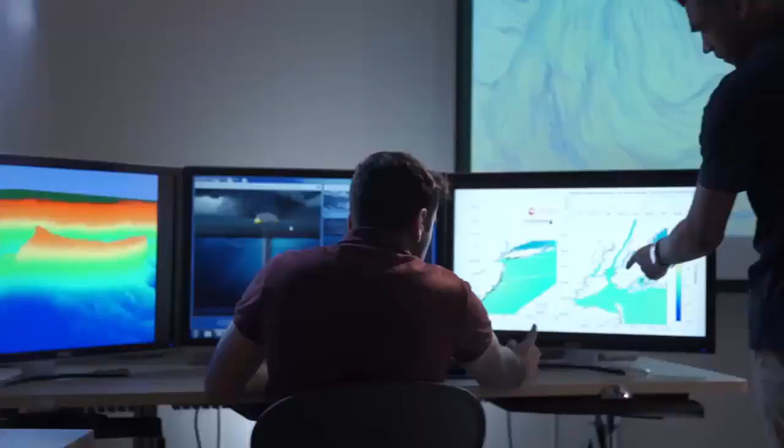In the Sustainability Management Master's Program, you are answering one simple question. Do you care about your future generation? If you care about your kids, their grandkids, then you care about sustainability. And a sustainability manager is someone who has the tools to make people understand how they can contribute towards developing a sustainable world.

We have both part-time and full-time students. Our curriculum is 30 hours. Instead of a thesis, we have a research project course and a seminar course which provides them with the kind of research background they will need to be successful in their job. At the same time, sustainability is not always everything about environment. It also relates to the business.

They will take a sustainable business strategies course. They will take a project management course. Most of these courses are going to be taught by industry people, the people who are doing sustainability on a daily basis as a part of their job. Any organization that has a large number of employees and has a physical infrastructure, they will have to have a sustainability office.

If you have the passion to develop and maintain a sustainable world, come to us and we will help you shape your passion into a career which will create an impact.

So I'll just briefly introduce myself and give you my background. As you were told, I'm a Stevens alumni. I started my undergraduate in 2005 and graduated my undergraduate in 2009 in environmental engineering. At the time I was getting ready to graduate, I started doing some job interviews, mostly brownfield remediation sites, wastewater treatment facilities, which is what I was looking at the time based off what my degree was focused on.

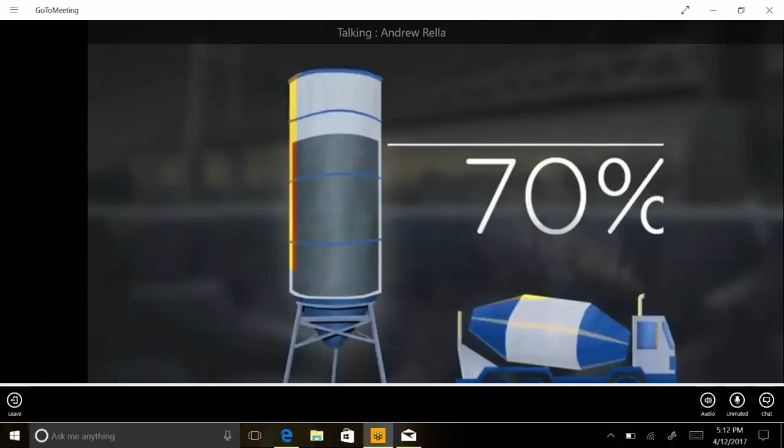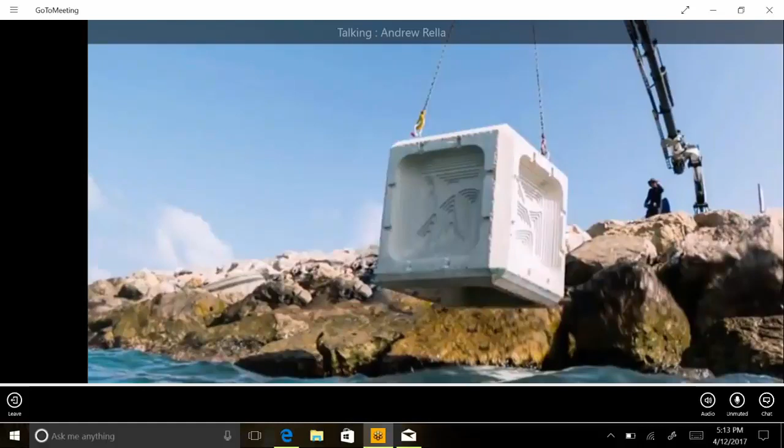ECOncrete brings urban and coastal concrete infrastructures to life using proprietary bio-enhanced concrete. Two thirds of the world population concentrated around coastlines, exposed to ever-increasing extreme weather events and rising sea levels. Accelerated coastal development is inevitable, creating tremendous pressure on marine ecosystems. 70% of coastal infrastructure is concrete-based. Our science-based concrete compositions, textures, and designs enhance the biological performance and ecological value of concrete structures, while increasing their durability and lifespan. ECOncrete provides services from A to Z, from site analysis, concepts and design, through product supply, to project monitoring. Our technologies can be applied as ready-to-use precast products or by using our unique forms alongside our bio-enhancing admixtures.

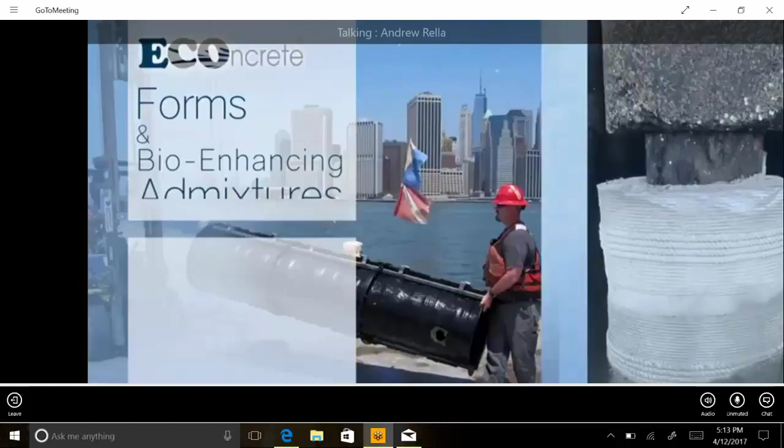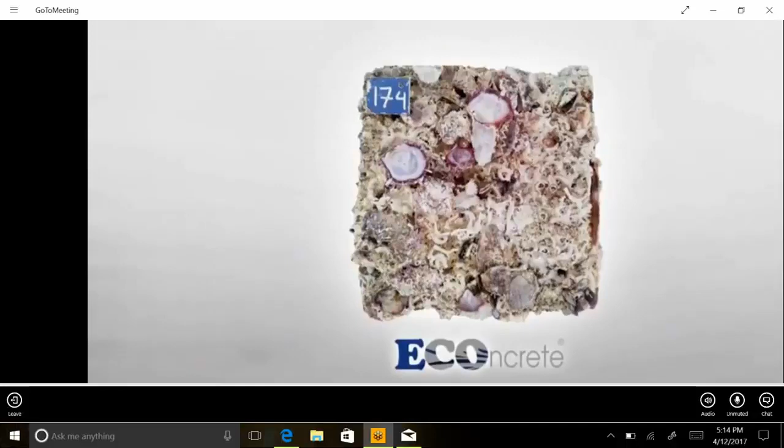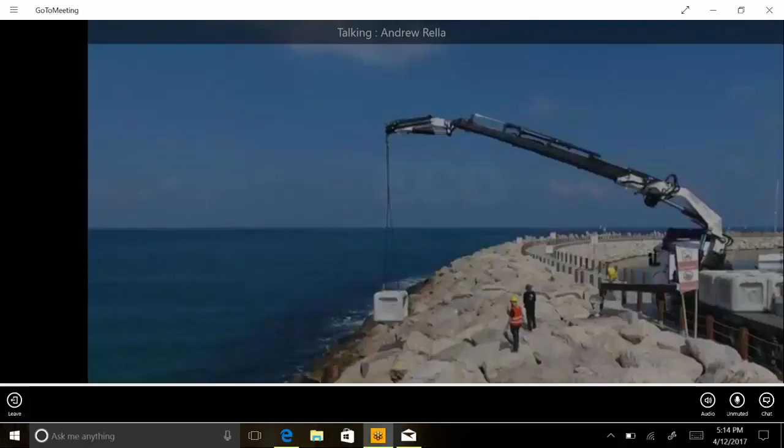The company's line of precast products currently includes ecological armoring units, enhanced seawalls, design tide pools, and articulated concrete marine mattresses. Our forms, liners, and admixtures can be used for on-site casting of new elements or for retrofitting structures like pier piles. These can also be used by licensed partners at their home facility. All our products are tailored to encourage growth of diverse plants and animals, such as oysters and corals, which build calcitic skeletons on the concrete, in a process called bioprotection. This calcitic layer encases the concrete, contributing to the strength and stability of the structure. Our patented bioenhancing admixtures have been fully tested in a variety of marine ecosystems across the globe, yielding excellent results. We have succeeded in creating a win-win solution for both thriving ecosystems and high-performance concrete structures. The scientists and professionals at ECOncrete are proud to be at the forefront of the next generation of ecological engineers, and we invite you to join us.

Okay. So I like starting with that just because it gives you a general background and sort of a great start to introduce our technologies and how we try to implement them into coastal infrastructure projects. So getting right into it, ultimately the population of the planet has increased exponentially, especially over the last

100 years or so. And a lot of those populations, actually more than 70%, are focused within 100 kilometers of the coastline. With that high population, there come these stressors on the shorelines, where there's pressure to keep water out, to stop erosion, to protect the land where it is, where historically civilizations or different cities weren't located so close to the ocean, or you wouldn't have homes typically on barrier islands like we see in New Jersey.

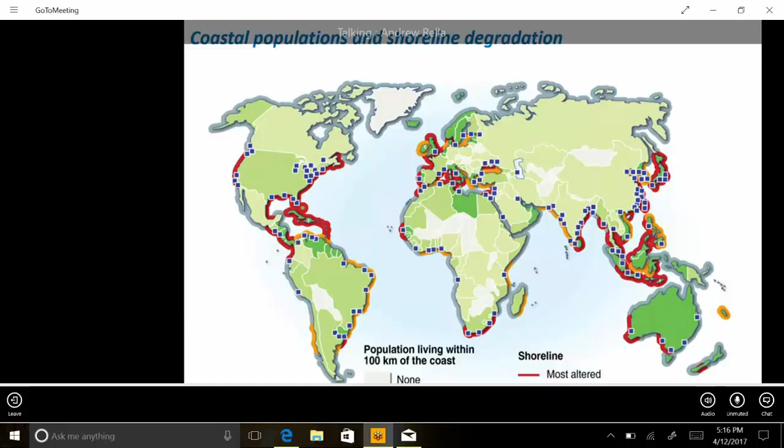Really, we've exposed ourselves to vulnerabilities by creating infrastructure, homes, utilities so close to the shoreline. So ultimately, we've been forced to, what the term would be, harden the shoreline, and along with that hardening, unfortunately, there's been a significant loss of habitat, species biodiversity, species abundance.

Ultimately, what we have done is we've taken the intertidal zone, which in a natural environment is anywhere between your high water and your low water within the daily tidal range. And that's, in a natural setting, the most diverse and abundant place for these species to develop, because there's the most sunlight, the most nutrients, higher flow rates along the surface, so there's better circulation, so you can clean the water better.

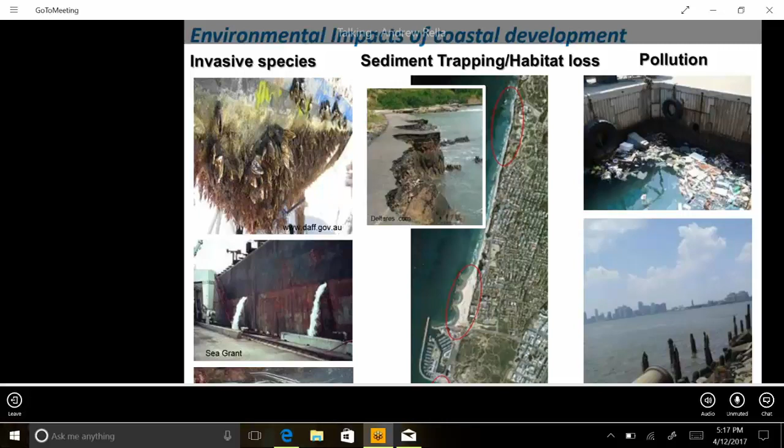All in all, more than 90% of the species that grow prefer to grow in the intertidal zone itself. But over time, we've replaced all these natural settings with vertical concrete structures, wooden structures. And here we see that more than 70% of coastal infrastructure is concrete-based. There's lots of reasons for that.

Basically, concrete was invented in ancient times by the Romans, especially the concrete for setting in water. They developed, as I mentioned earlier, admixtures. They added in different ash materials, volcanic ashes, into the cement that actually allowed it to cure underwater and to dry and get stronger over time. So concrete is an extremely useful product.

If you're in an environment like the Mediterranean or Israel, you see these large units here on the bottom. Those are antifers, armoring units. There's dozens of these different proprietary units, and they're popular in that region because they don't have stones large enough to combat the wave erosion they're exposed to. During winter conditions, waves from 20 to 30 feet are typical along some of these shorelines. So there's not enough natural stone large enough to mitigate that impact, so they make precast units.

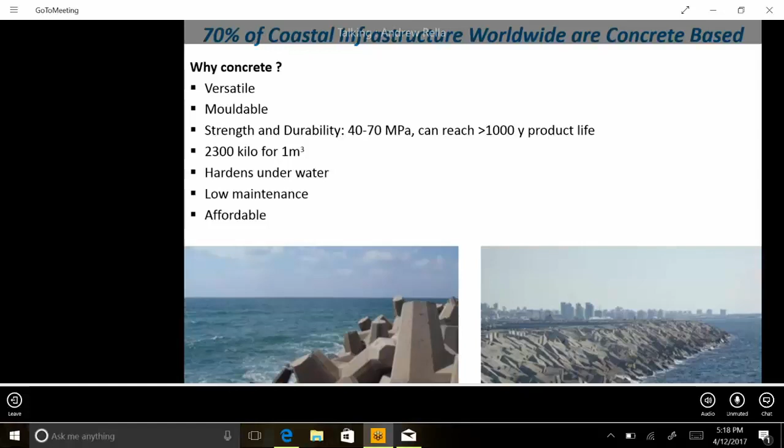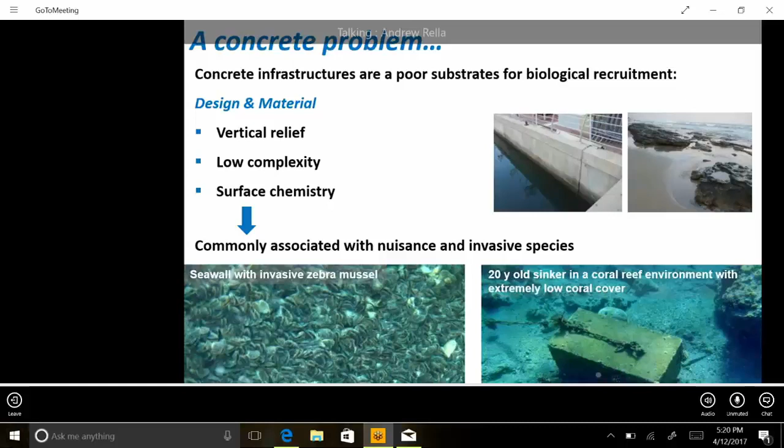Also, concrete, as you see on the top, is created traditionally in these vertical forms, right? Say in New York, the tidal range is 4.5 to 5 feet. So your tidal range is literally restricted to that vertical distance of 5 feet. It travels up the wall to the high point, travels down the wall 5 feet to the low point. However, in the natural shore zone next to it, same tidal difference, 5 feet, but it's allowed to impact hundreds of feet of the shoreline due to the mild sloping shores.

So what we like to do at ECOncrete is we modify the composition of the concrete itself with our admixtures. You can run it for me. Portland cement has a pH of 12.5 to 13. It's extremely basic, and that's one of the major reasons why these organisms can't populate its surface. There's plenty of naturally occurring larvae and organisms in the water, and if there were substrates more natural to them, they would occupy them.

However, since we're using concrete, there's a lot of chemicals that leak out of concrete over its lifetime. There's just a lot of negative components in it, often even the mold release. Sometimes in these units they use all sorts of oils and really not environmentally friendly materials. So what we do is we replace anything that's negative with something that could be positive for biology.

So for our mold release, you can imagine that if you're cooking and you want to spray oil on your pan, it depends which oil you use, whether you're using virgin olive oil versus coconut oil. Just as it affects your food, it affects the chemistry of the concrete. So we actually use a vegetable-based form release for our products.

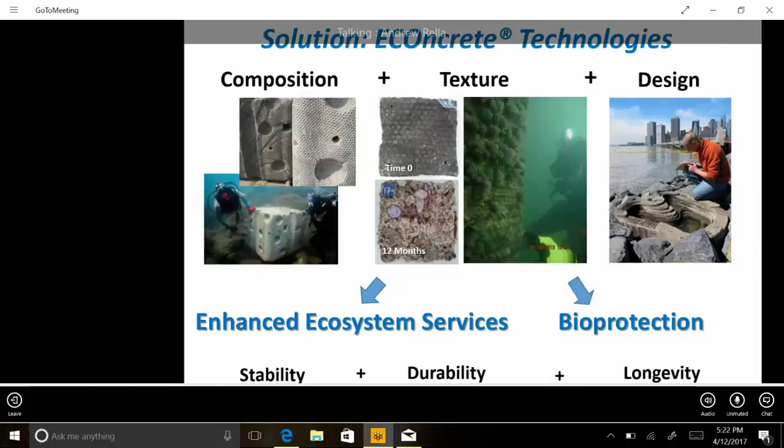We take basically a three-pronged approach: composition, texture, and design. But the benefit really is, of course, you get ecological uplift of your system, so you're promoting the development of these organisms on your structure. From a structural standpoint, our concrete has no limitation. We can make it to any strength, we can meet any specification that any contractor or project would like us to meet. However, it comes with this advanced development of biological organisms, which actually serves to make the concrete stronger over time.

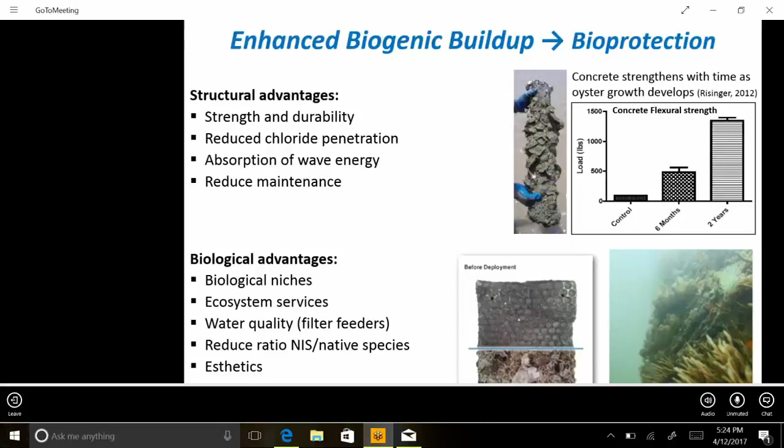So over time, the entire structure is becoming encased with these organisms, not only increasing its strength and carrying capacity, but creating a buffer between the environment and the actual concrete unit itself. These organisms will absorb the wave action, currents, and any forces from floating debris. Say you have a huge, massive storm and a lot of these organisms are wiped out, they're completely resilient and they rebound on their own. So we're actually reducing maintenance and increasing the lifespan of the project. Not only do we have the ecological and biological advantages, but from a structural standpoint, we also have a superior product.

So I'm going to pick up the pace a little bit here because I'm aware of the time restriction for today. When the company started in 2011, we ultimately had to evaluate our products.

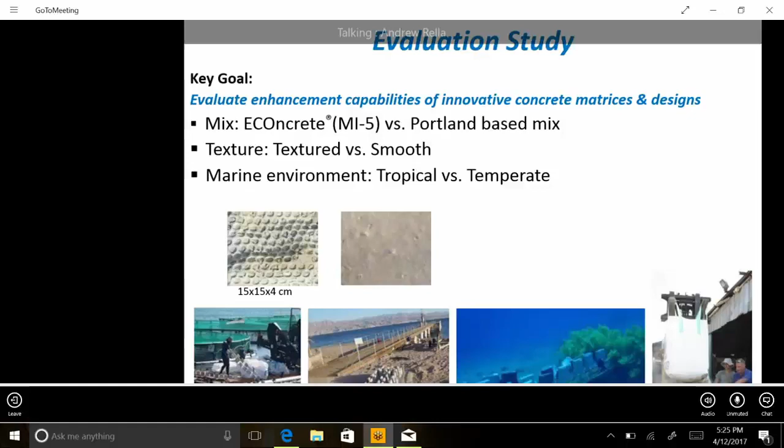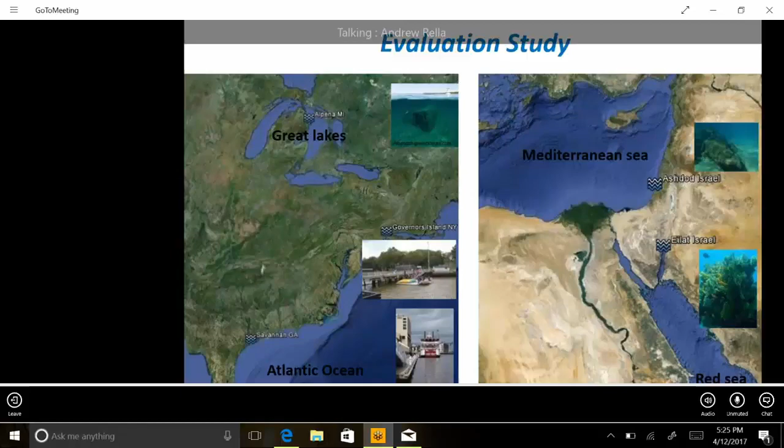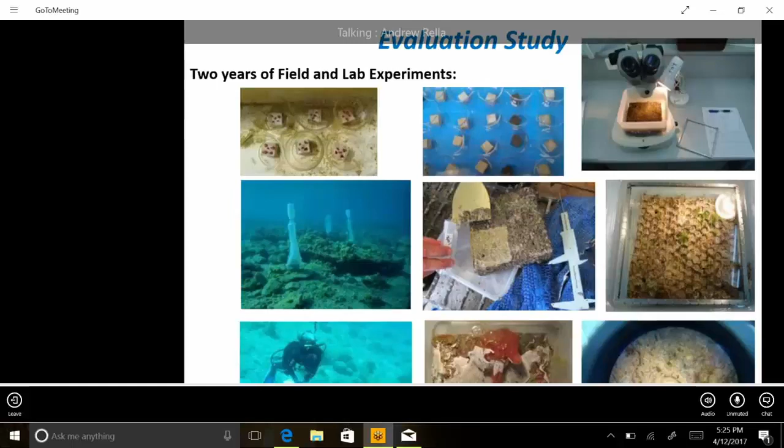We did this both in a lab setting and in the field. We looked at 5 different ECOncrete mixes versus standard Portland cement, and we looked at both textured and smooth surfaces. And we evaluated it around the world: in the Red Sea, the Mediterranean, the Great Lakes, which was freshwater, Governor's Island, Brooklyn Navy Yard, Savannah, Georgia, and the Florida Keys. A lot of the findings from this study you're going to see repeated throughout the presentation with all of our projects. Ultimately, we were able to increase biology in every case versus the Portland cement.

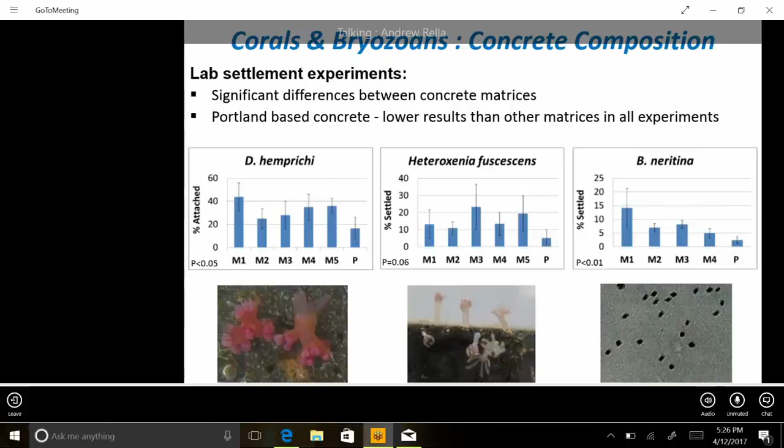So here, this is looking at some of our lab experiments. We looked at 3 different types of species in the lab. You can see Portland cement is the last bar on the bar graph. So in every scenario, every mix, no matter what the environment was, even though we now know which mixture is most appropriate for which environments, they would still outperform Portland cement in every case.

And then we also looked at oysters. This was specifically working with the group at Governor's Island. I don't know if you're aware, but there's a very large movement to restore oysters to New York Harbor. New York actually used to be the oyster capital of the world, and over 99% of that oyster population has now become extinct through pollution and over-harvesting in the early 20th century. There used to be 350 square miles of oyster habitat in the Hudson-Raritan estuary, and that has been completely eliminated.

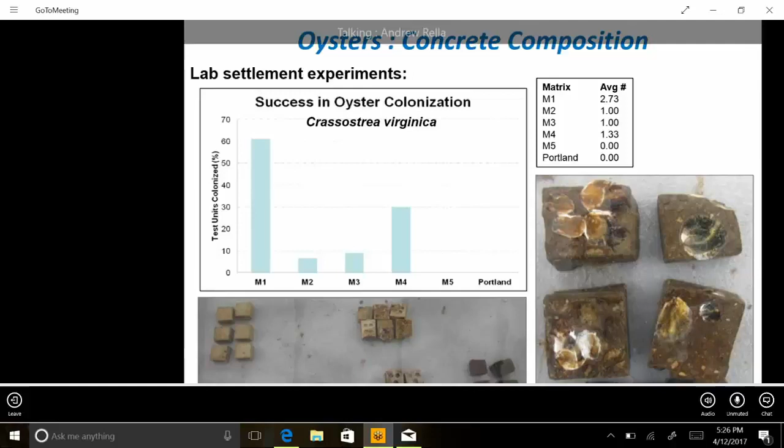So here we look at the concept that I was discussing earlier, the textured versus the smooth surfaces, and you can see that our mixes performed fantastically in each scenario, completely covered and encased in these biological organisms. They have 100% coverage, right? But the textured surface promoted a much more, you could say, 3D version or denser populations of these organisms compared to the smooth surface.

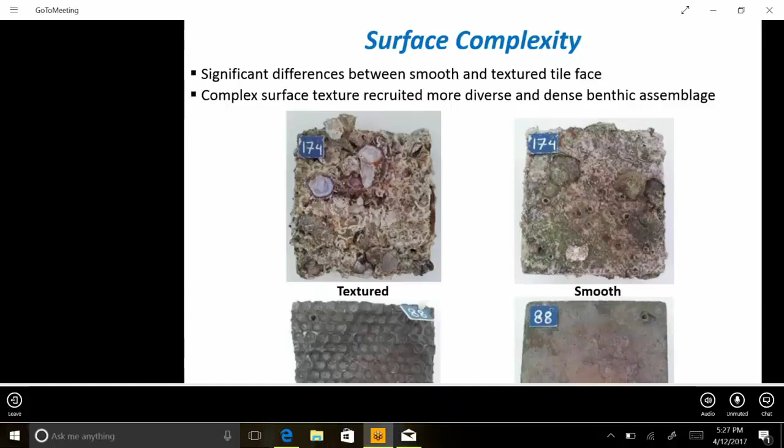Now we're going to get into some of our earlier proof of concept and pilot projects. So this is our ecological armor unit, which has been deployed out in Haifa in Israel, in the ports. And ultimately they had these standard protection units that were deployed along the shoreline for years. I think it was over 10 years. And they wanted us to deploy some of our units and see how they fared versus those original units.

So right here you see what we call the control antifers, and antifer is just the name of this particular unit itself. And then our ECOncrete antifers, which we developed with the enhanced composition and enhanced textures. So dramatic differences you can see here.

And then for every project we've done, since I have an academic background, and the 2 founders of the company also have PhDs from Tel Aviv University, we do peer-reviewed published papers on all of our projects. So we do 2-year monitoring, ecological and structural monitoring of every project we do. We'll actually go in and scuba dive it ourselves and do these different surveys.

So you can see here, again, that the ECOncrete outperformed Portland in every scenario. It even reduced the amount of invasive species, and again, higher abundance. We're always looking at both biodiversity and abundance. We not only want a lot of a species, but we want a lot of different species. It creates a more resilient system.

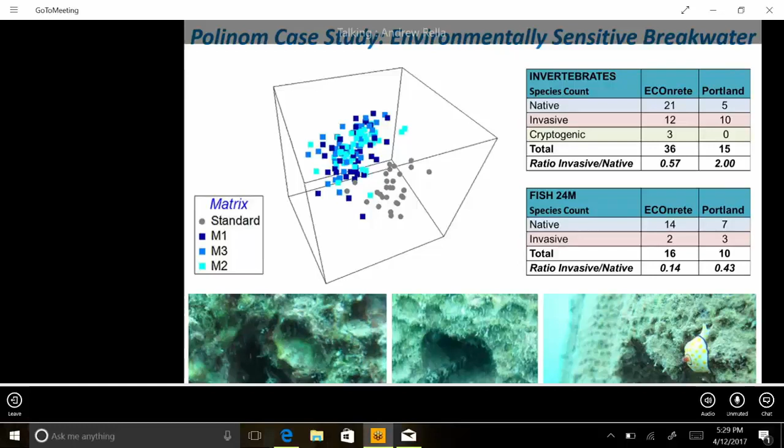This is our seawall project right here. Again, deployed out in Israel. And these are basically, again, a pilot project that was deployed as a temporary installment to evaluate our mixes. You can tell that this has a different texture than the unit you saw here.

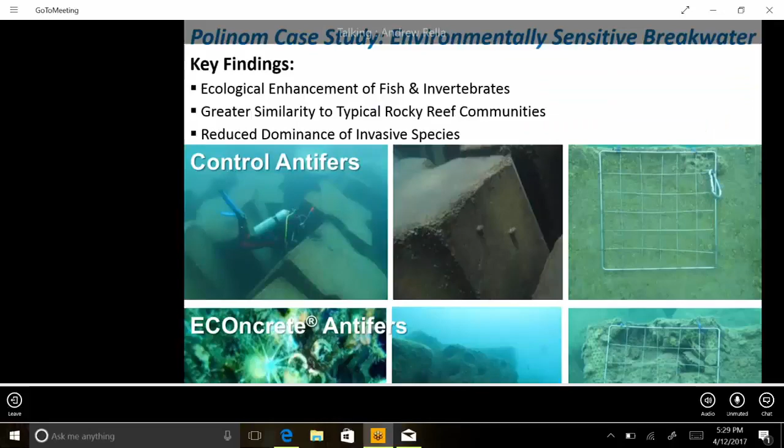So these are actually subtidal units, so these are completely submerged, whereas these are intertidal units. So these are actually exposed to the intertidal zone, so sometimes they're dry, sometimes they're wet, but ultimately there's different species that populate each zone. So our texture is based off of what we call a target species. We look at the environment, we see which species we want to develop, and the composition and the texture is based off of those species.

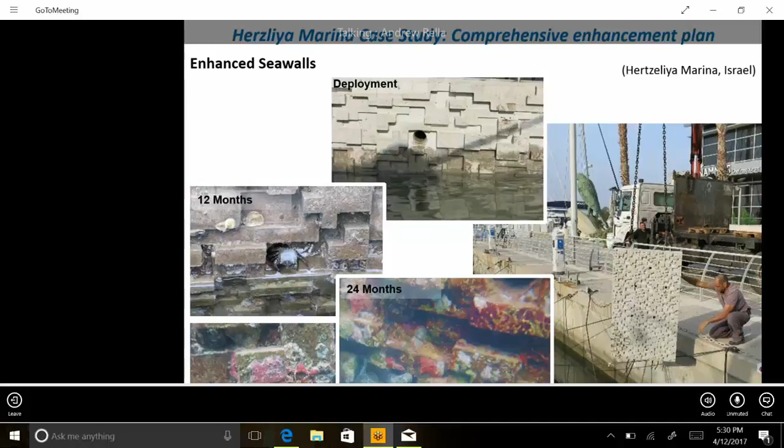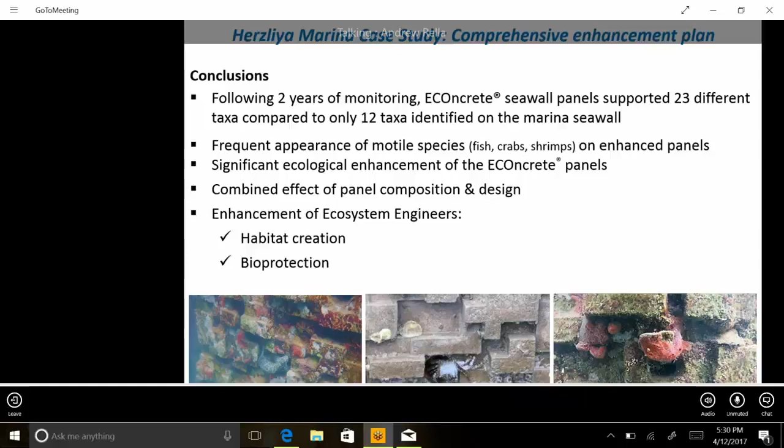Like I said, I'll go through these next couple slides pretty quickly because we see the same results. But ultimately, within a 6-month to year time frame, we saw an improvement of biological development, and within a 2-year time frame, in every case, we get 100% coverage of the structure. And again, this just speaks to what I just said. We have higher abundance, higher biodiversity in every situation versus the standard Portland concrete.

These are our tide pool units, which I briefly mentioned before, and this project is actually up in Brooklyn Bridge Park, and we'll see a little bit more about Brooklyn Bridge Park in a minute. But these tide pool units, they go along a revetment or a riprap shoreline, basically any sort of sloping shoreline that's been protected with stone.

And what these units do, as you see in the bottom left picture, they've been placed in what looks like a dry area, right? So they've been placed at the mean high water. So that basically is the highest point water will reach every day. So what they do is they capture water during that period of high water, and then when it's low tide, as you see here, biology can still develop. And these are some of the species that we see. Here it's more algae. Again, now you're dealing with intertidal versus subtidal species.

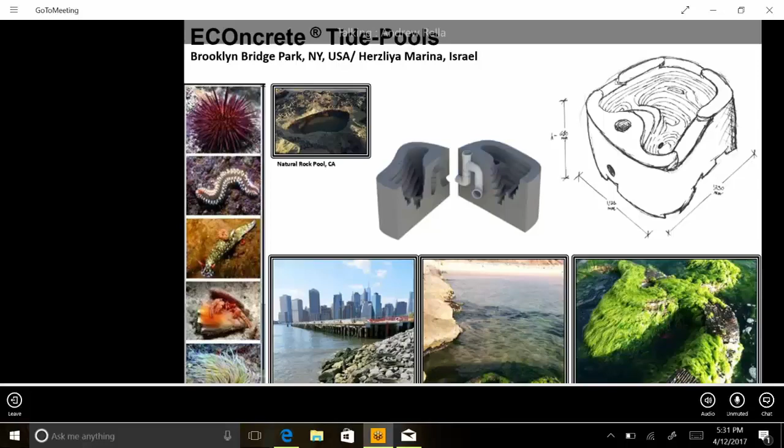And these timber piles actually, in New York, they are driven to bedrock, which is over 180 to 200 feet. So that's why you need that timber pile in the middle, because of course you can't have concrete going all the way down that extreme distance. So what they do is they encase any portion of the timber that is exposed to water in concrete. However, that concrete breaks down over time, ultimately has a lifespan of about 10 to 12 years, and they have to replace it. And this is a multi-million-dollar operation that has to continue at all times.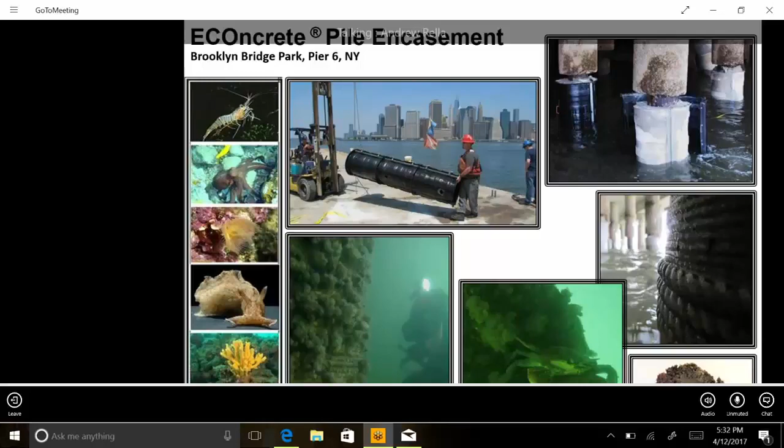So what we did is we developed special texture and special composition to encourage biology so that we can increase the lifespan of these concrete units so that we can then reduce the overall cost that the city is spending on these pile encasements. But this right here shows you Brooklyn Bridge Park.

I would suggest that if you guys have any free time to go over there for sure. It's right by Manhattan and Brooklyn Bridge. So often when we're doing the monitoring, I'll just ride my bike and take the ferry over from Hoboken or Weehawken and just ride my bike over the bridge. And it's one of the most awarded waterfront developments in New York City. So again, if you have any time to go over there, it's just a really beautiful scenery. And you can see loads of different living shoreline projects.

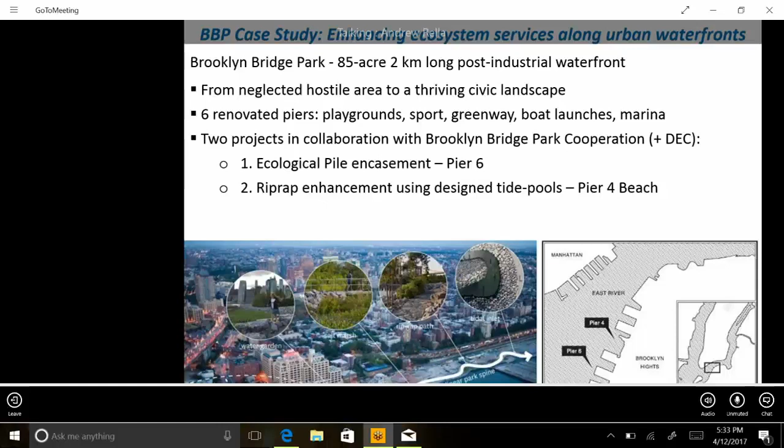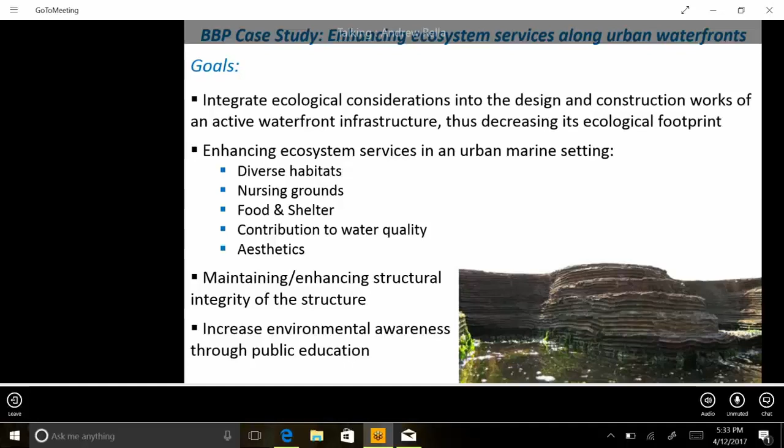But ultimately, they came to us because they wanted structural units, so they wanted these units to perform in a way that they would reduce erosion, protect the shoreline, because that's always their primary function. Then they also wanted us to bring in ecosystem services, ecological uplift. They wanted to basically improve the ecosystem of the park, as well as promote different educational programs for kids. So this, again, just speaks to what I've spoken about as far as ecological pile encasement. So I'll continue past this. I want to make sure we have enough time for questions and discussion.

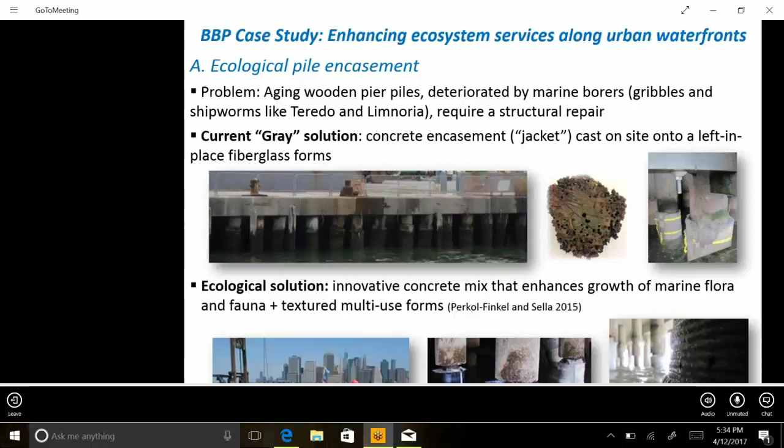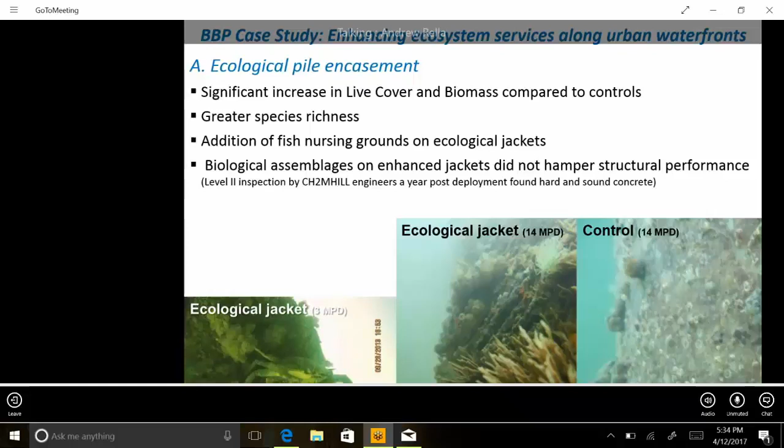But here are the results we saw. On the bottom left, that was within 3 months post deployment, we had blue crabs mating on the piles, and we had over 60% coverage. Within the 14 months, so just a little over a year, we had 100% coverage, and then compared to the control units, very drastic difference.

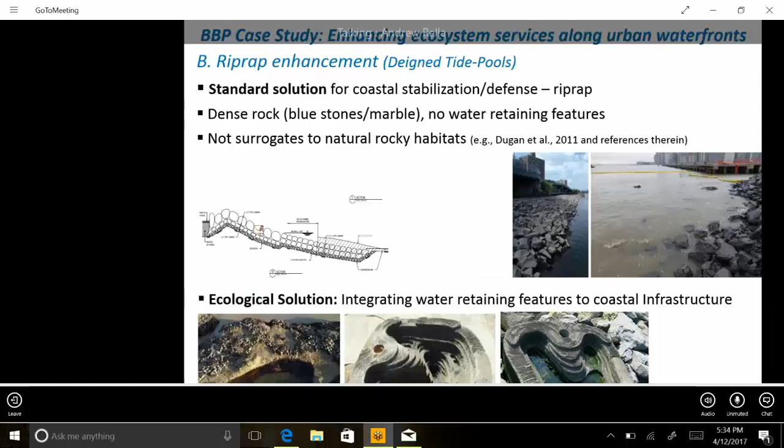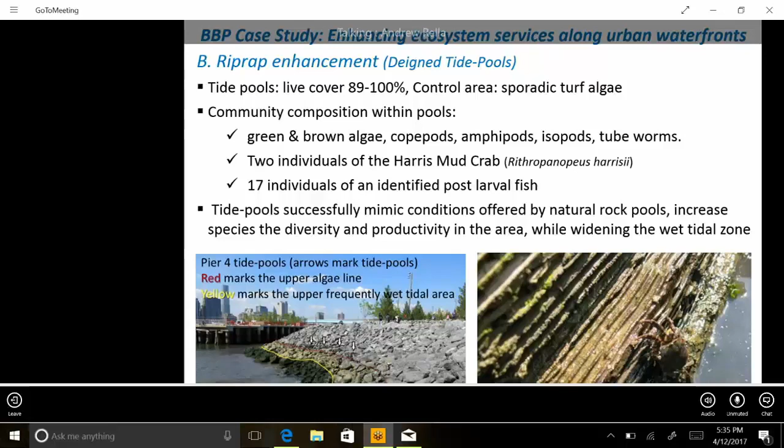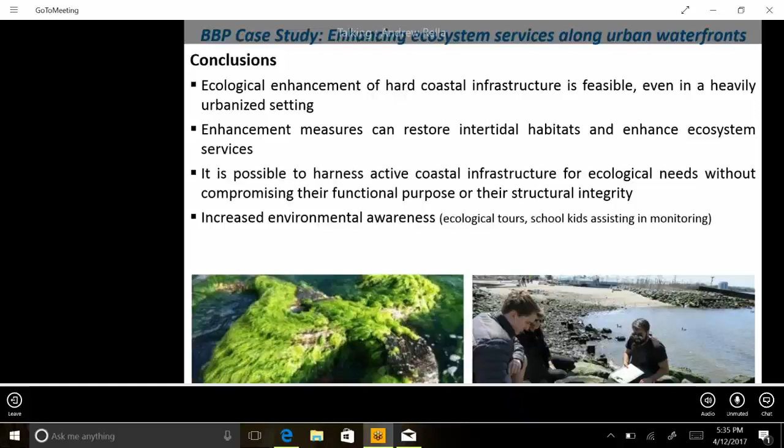And again, here are the riprap units which we installed. And what I want you to see here is on the bottom left, that red line is your mean high water, the yellow line is just about your mean low water, and the arrows are pointing to where the tide pools are. So ultimately, this would traditionally be a zone that is completely void of biology because it's too dry. And what we've been able to do is bring a full ecosystem to each one of these tidal pools. So again, I think here we said, yeah, 17 individuals of a post larval fish were identified. And again, normally this surface would be completely void of biology. So those are some of our early on smaller pilot projects.

After Hurricane Sandy, President Barack Obama initiated the Rebuild by Design competition. And ultimately what they decided was that we couldn't repair our system in a piecemeal or patchwork way, right? We couldn't just put up a small wall here 100 feet and something else here and something else there. We needed to start looking at a regional approach, make sure that the damages we saw during Hurricane Sandy wouldn't happen again. So we basically developed a team.

Stevens was involved, so I was actually on the team as a Stevens personnel at the time, and then now also ECOncrete was involved, so now I'm still working with the project through ECOncrete. But ultimately we're doing a 2-mile breakwater, and let me see if the next picture shows you.

So there's 6 projects in total, and this project is actually in Staten Island. It's a 2-mile breakwater, and basically it functions to dissipate wave energy before it reaches the shoreline. Your shoreline is a sensitive sediment beach environment. So what we do is make this rock barrier offshore so the waves will break on this surface, and then you have a calm, quiescent area behind it, which is more favorable for recreation, for biology, and for

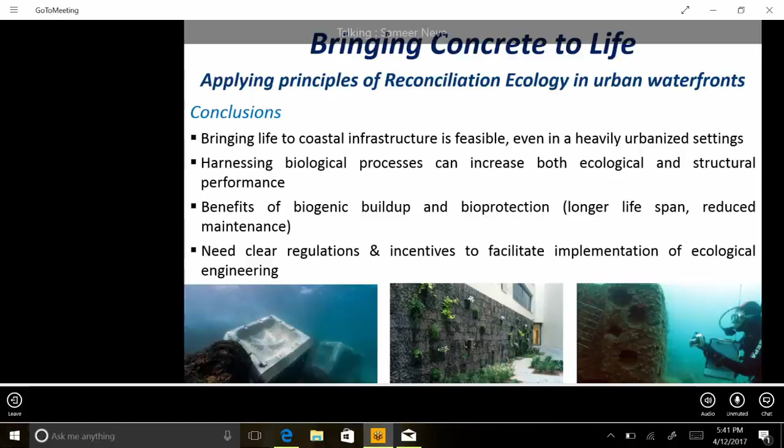And that's all I have, so I think it would be a good time for questions. And again,